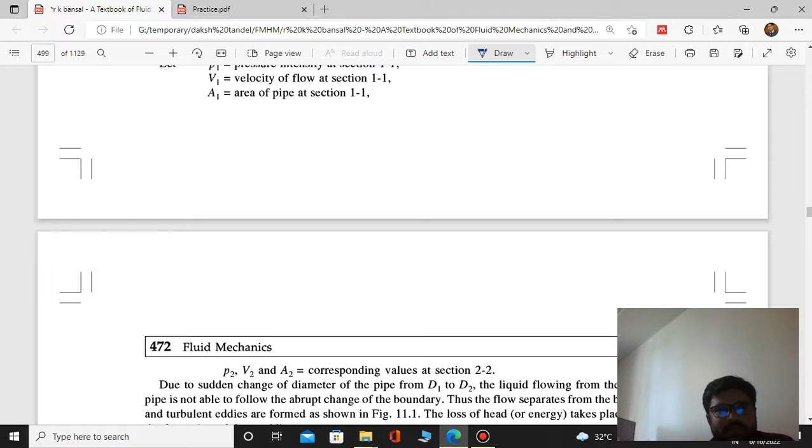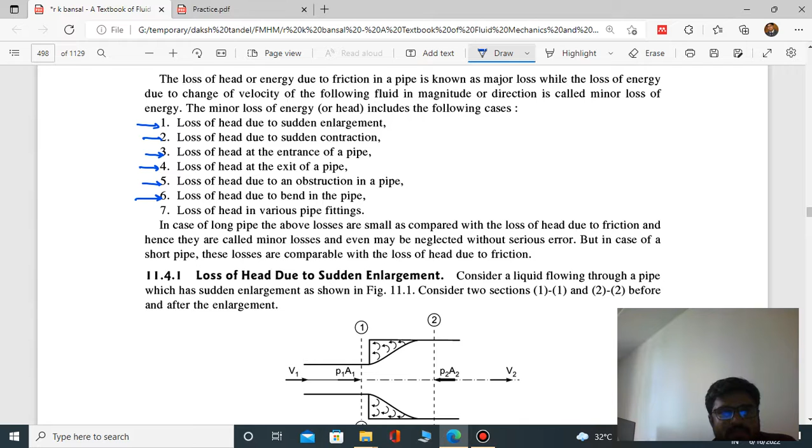So loss due to sudden enlargement. If diameter of pipeline suddenly increases, at that time also loss occurs. So that will be known as minor losses. So sudden enlargement, sudden contraction, at the entry, at the exit of pipe, if there is an obstruction in pipe. So because of this reason, if losses occur, that will be known as minor losses.

So we will not discuss all in detail, but the first loss we will have to discuss in detail, because here we will have to derive the equation for loss. So let us draw a diagram and then after we will derive that equation. So here let us assume we have a pipeline. In the pipeline, if there is sudden enlargement, suppose let us call this section 1, and this section 2, and flow is taking place in this direction.

Clear? So let us apply Bernoulli's equation first. If you apply Bernoulli's equation, P1 by rho g plus V1 square by 2g plus Z1 is equal to P2 by rho g plus V2 square by 2g plus Z2 plus HE. Now here you can see these we can cancel because there is no height difference.

So what will be the equation of HE? Here you can see, P1 minus P2 divided by rho g plus V1 square minus V2 square divided by 2g. So let us call it equation A. We will use it later on.

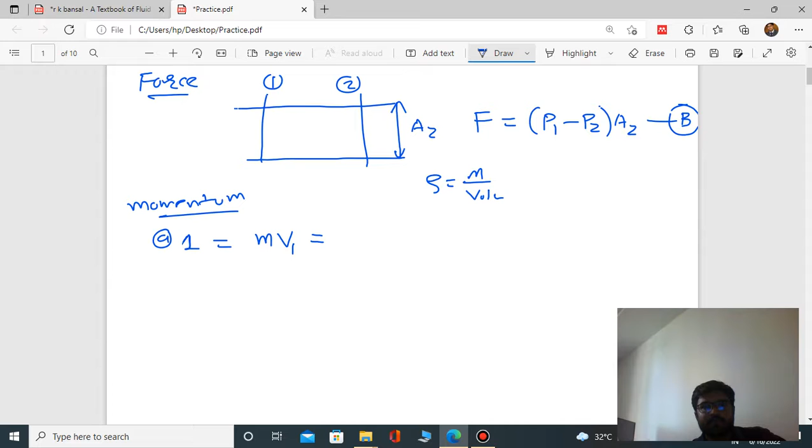In the momentum equation, let us take momentum at point 1. Momentum means mass into velocity. What is density? Mass divided by volume. And volume is area into velocity. So mass is rho into A1 V1, into V1. So the final equation will be rho A1 V1 square. This is momentum at point 1.

Now momentum at point 2, m into V2. Same way, here we write A2 V2 and V2. So the equation is rho A2 V2 square. Clear? Now we know that change in momentum is equal to force. The force we take from equation B, and the change in momentum is rho A2 V2 square minus rho A1 V1 square.

Clear? Now here I want to replace this A1. We know that A1 V1 is equal to A2 V2. So in place of A1 we can write A2 V2 divided by V1. Let us replace that: rho A2 V2 square minus rho A2 V2, with V1 square on top and V1 at the bottom. So V1 gets cancelled.

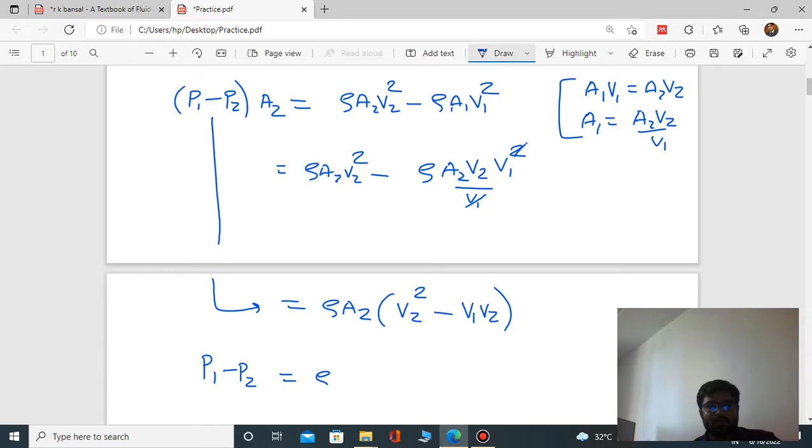So what will be the final formula? Keep rho A2 common, and in bracket V2 square minus V1 into V2. So this will be the equation. Now from here we will find out P1 minus P2. A2 gets cancelled, so P1 minus P2 will be rho into V2 square minus V1 V2.

Then P1 minus P2 divided by rho is equal to V2 square minus V1 V2. Now let us divide both sides by g. So P1 minus P2 divided by rho g is equal to V2 square minus V1 V2 divided by g. Now this value we will put in equation A. So what was our equation A? Let us check that.

HE is equal to P1 minus P2 divided by rho g plus V1 square minus V2 square divided by 2g. So in place of P1 minus P2 by rho g, we write V2 square minus V1 V2 divided by g, plus V1 square minus V2 square divided by 2g.

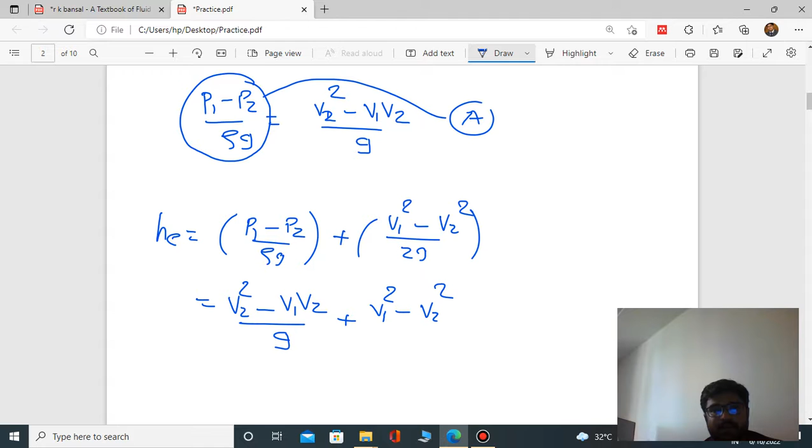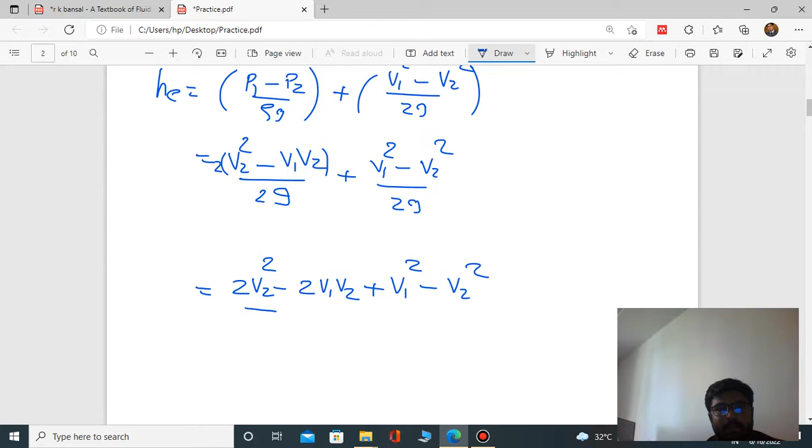Now here you are multiplying by 2 at the bottom, so on the upper side also you have to multiply by 2. So the final answer: 2 V2 square minus 2 V1 V2 plus V1 square minus V2 square, divided by 2g.

So once again, V1 square minus 2 V1 V2 plus V2 square divided by 2g. This is basically V1 minus V2 whole square divided by 2g. So that is our HE. This is the head loss due to sudden expansion.

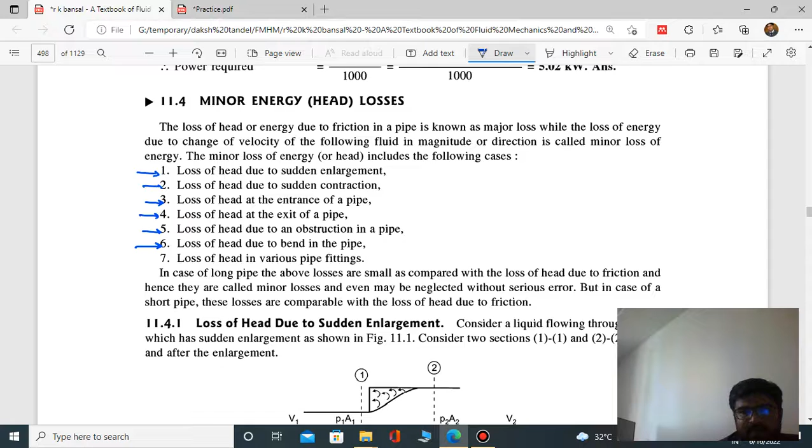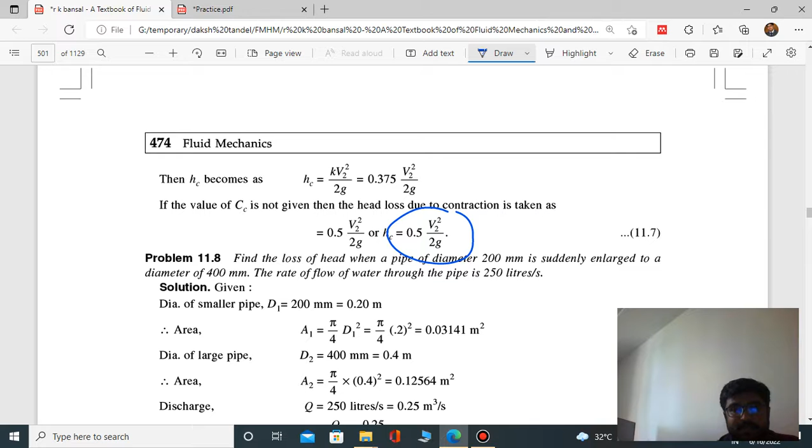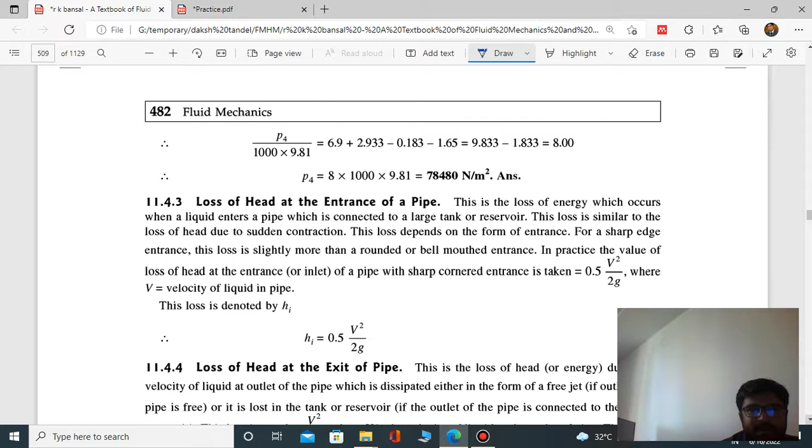Now the rest of the losses you can directly check, no need to go in detail. If there is a sudden contraction, the head loss is 0.5 V2 square by 2g. Then, loss of head at the entrance of the pipe, this is the equation. Exit of the pipeline, this is the equation.

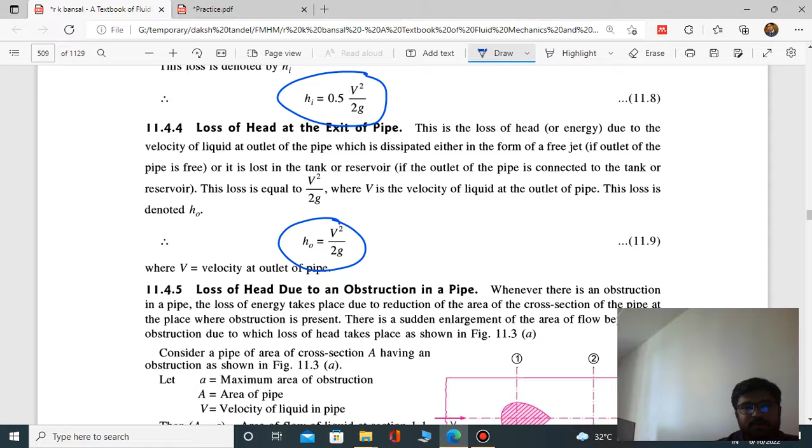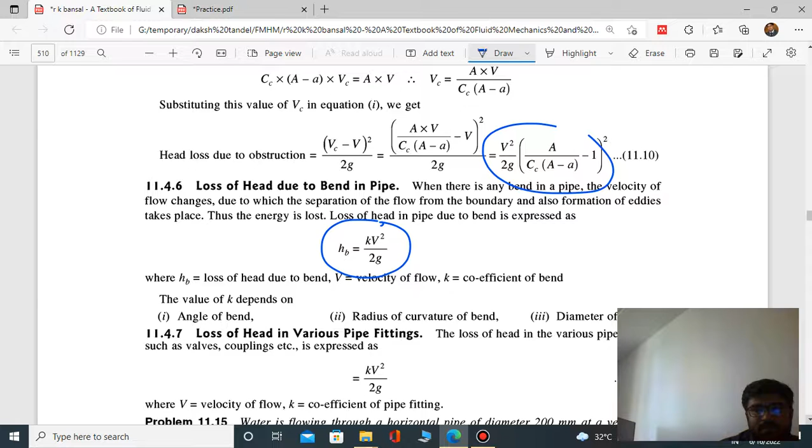If an obstruction is there inside the pipeline, this is the equation of head loss. Loss of head due to bend in pipe, this is the equation. Or loss because of pipe fittings, these are the equations. These equations you will have to remember, no need to derive them.